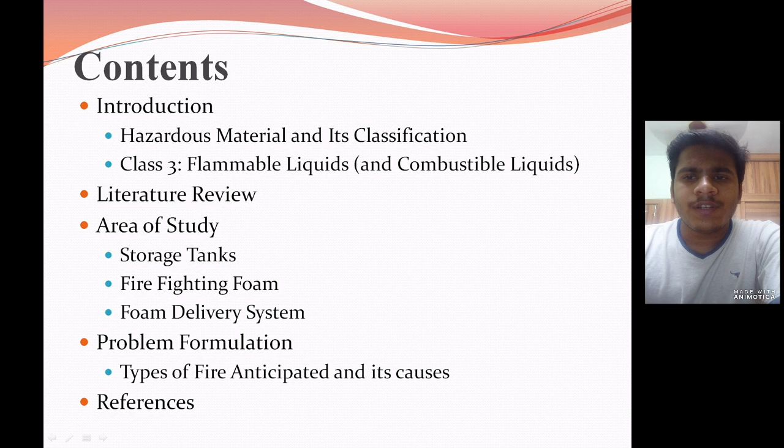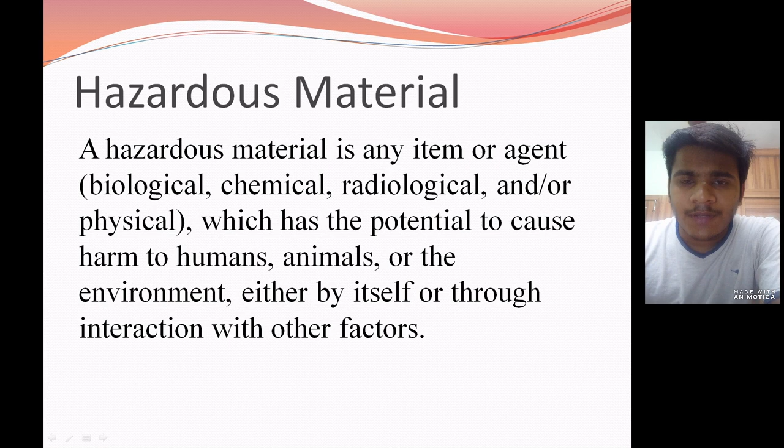Now let's start with introduction. Hazardous material are the objects which pose any potential to harm the environment, humans, animals around it, either directly or indirectly. Classification of hazardous material.

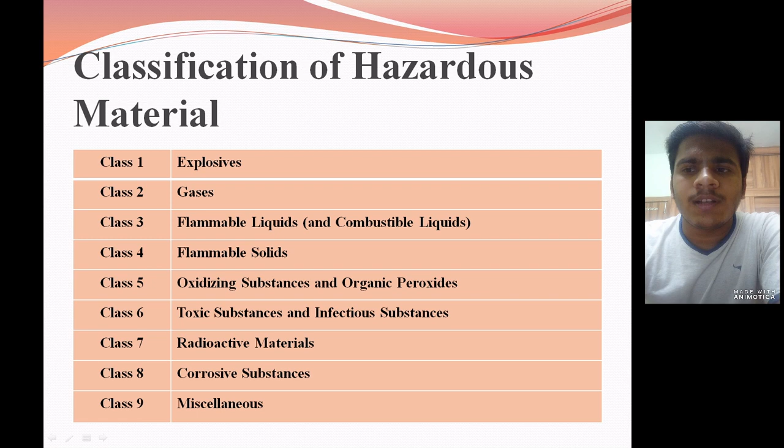The most worldwide accepted classification of hazardous material includes 9 classes: class 1 explosive, class 2 gases, class 3 flammable liquids and combustible liquids, class 4 flammable solids, class 5 oxidizing substances and organic peroxides, class 6 toxic substances and infectious substances, class 7 includes radioactive materials, class 8 includes corrosive substances, and class 9 includes miscellaneous substances.

This project is mainly focused on the storage of class 3 substances, that is flammable liquids and combustible liquids. This category is divided into two divisions: class 3.1, flammable liquids, which are liquids with flash point below 60 degrees Celsius, and class 3.2, combustible liquids, which have flash point above 60 degrees Celsius.

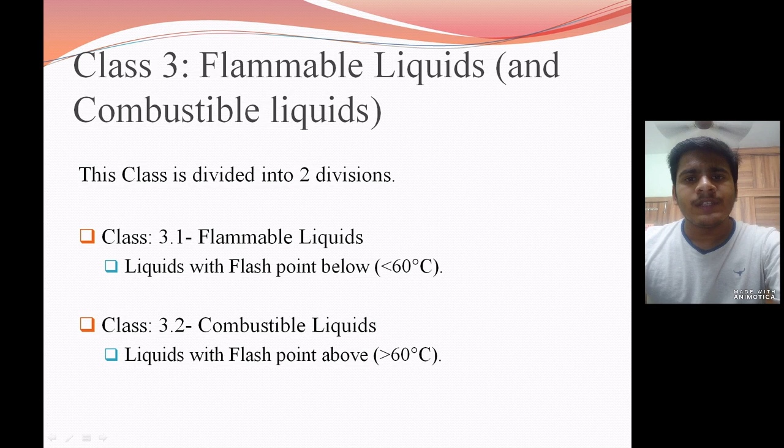Hello everyone, my name is Anurag Verma and I am going to talk about the literature review of our project. The first literature review was given by H. Pretrel, W. Le Saux and L. Audouin in 2013. They contributed the experimental determination of the heat release rate of hydrocarbon pool fire based on oxygen consumption and carbon dioxide generation. They presented the chemical methods for the experimental determination of heat.

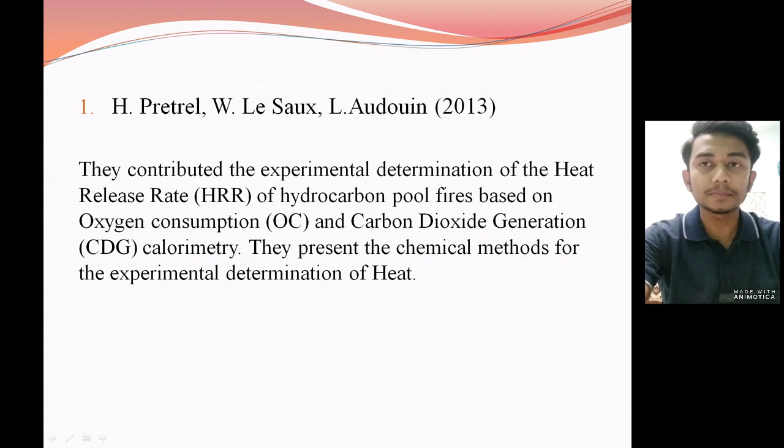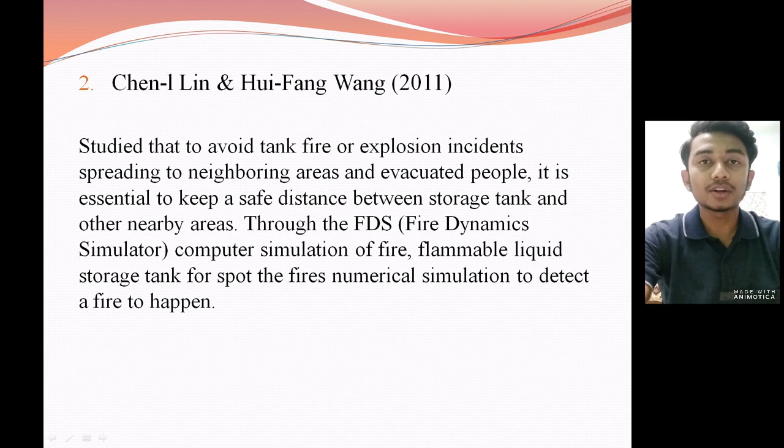The second was given by Chen Lin and Hui Fang Wang in 2011. They studied that to avoid tank fire or explosion incidents spreading to the neighborhood areas and evacuated people, it is essential to keep safe distance between storage tank and nearby areas. They did it by a fire dynamic simulator. It is computer simulated, which simulates flammable liquids storage tank for spot fire numerical simulation, to detect a fire to happen.

The next review was given by Ibrahim M. Shaluf and Salim A. Abdullah in 2010. They did research on boilover, which is considered one of the most dangerous fires in large scale fire. Boilover is basically when water, having higher density than most flammable liquids, settles down in tanks, and after a certain temperature it boils and creates huge explosion, because the water molecule expands to 1700 times its volume.

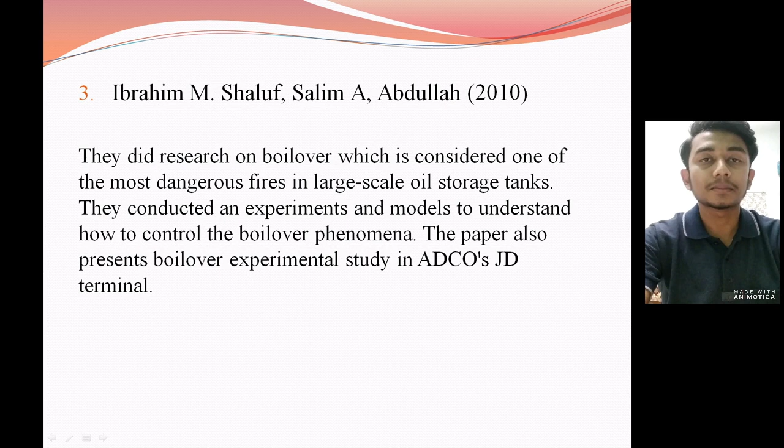So they conducted an experiment and models to understand how to control the boilover phenomenon. The paper also presented a boilover experiment study at ADCO's JD's terminal. Here ADCO is Abu Dhabi Company for Onshore Oil Operation.

The fourth review was given by Sir Thomas Steinhaus and Richard Carvel in 2007. They focused on burning behavior of large pool fires and fuel spill fire, and gave details of pool fire dynamics and considered factors which affect the pool fire. A series of well-defined parameters have been established to classify pool fire in a quantitative manner. The research clearly shows that despite the enormous body of work on large-scale pool fire, there are still significant uncertainties in our capability to predict the behavior of such fire.

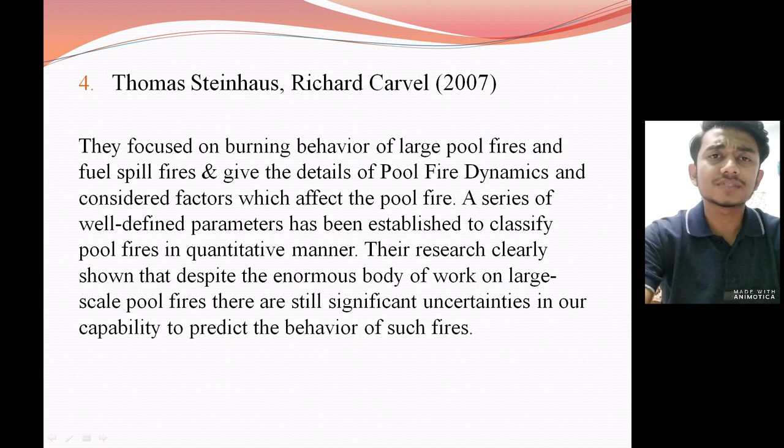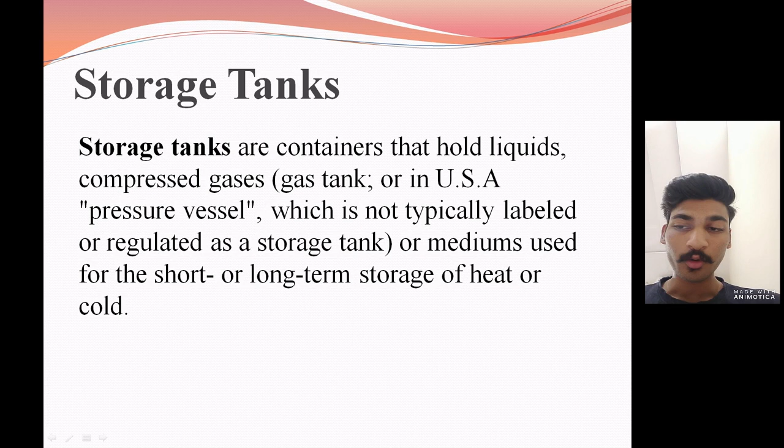My name is Abhinandan Chauhan, and now comes the area of study, in which our first part is storage tank. Storage tanks are the containers that hold organic liquid, non-organic liquid, compressed gases, and petroleum products. Storage tanks can be widely seen in petrochemical industries, oil refineries, etc. Storage tanks have different sizes ranging from 8-meter diameter to 90-meter diameter. Storage tanks are often cylindrical in shape, perpendicular to the ground, with flat bottom and a fixed or floating roof. Now let's come to the types of storage tank. As we know, there are 4 types of storage tank, which can be clearly seen on the screen.

They are: first, open top tank; second, floating roof tank, which are subdivided as external floating and internal floating roof tank. Third is fixed roof tank, which is subdivided as cone roof, dome roof and internal floating roof tank. The fourth type of tank is other tanks, which include bullet tank, bolted tank and sphere tank.

Now let's talk about the fixed cum floating roof tank. It is the safest storage tank, used for the storage of petroleum products of class A and class B. These tanks have a fixed roof over a floating roof. They are used for products having very stringent water content specifications like aviation turbine fuel, and products sensitive to oxygen like light intermediate feed tanks.

Another type of storage tank used for the storage of petroleum products is the floating roof tank. It is the most widely used storage method to safely control product evaporative emissions from volatile petroleum products. They are subdivided into two categories: external floating and internal floating roof tank. Both types are used for the storage of highly volatile substances like naphtha, xylene, toluene, etc.

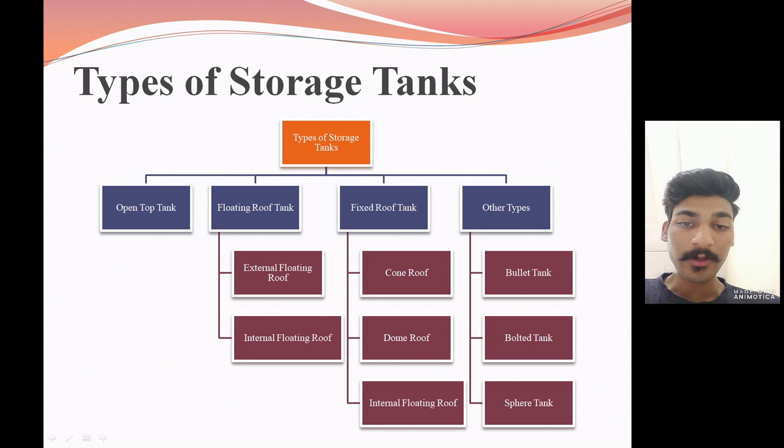Horton sphere is another type of storage tank used for the storage of liquefied gases, and the dome roof, which is a type of fixed roof system, is used for lighter material whose vapor pressure lies between 0.85 to 1.06 kg per centimeter square.

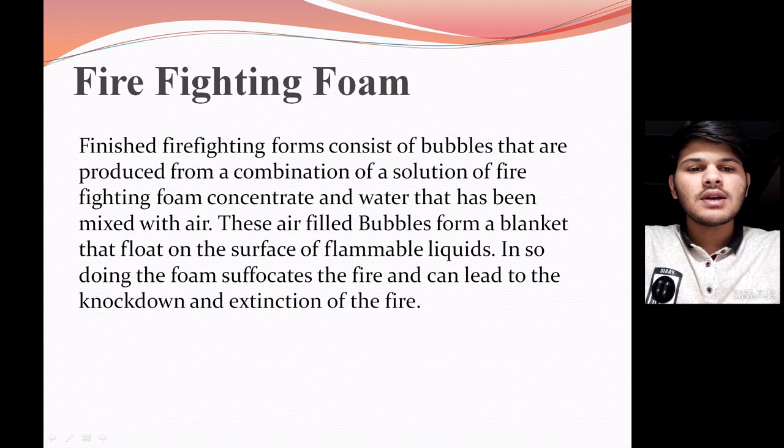These foams are provided first by mechanical foam compound. These foams are produced by air entrainment through mechanical means such as aspiration or air blowing. Mechanical foam compound is again classified into three types depending on the expansion ratio of the compound: low expansion ratio, medium expansion ratio, and high expansion ratio.

Low expansion of these foam compounds is up to 20 times. Medium expansion foam compounds can expand up to 200 times their volume and are generally produced by self-aspirating foam branch pipe with net. High expansion foam compounds have an expansion of up to 1000 times their volume and are generally produced by foam generator

using air fans. Second, chemical foam. Chemical foam is generated by chemical reaction. The most common ingredients used for chemical foam are sodium bicarbonate and aluminum sulfate with added stabilizer.

Classification of foam by composition. First, protein based foam. These are made from hydrolyzed protein with added stabilizer and preservatives. They form a thick foam blanket and are suitable for hydrocarbon liquid fires but cannot be used on water miscible liquid. Their effectiveness is limited on low flash point fuel which have lengthy pre-burn time.

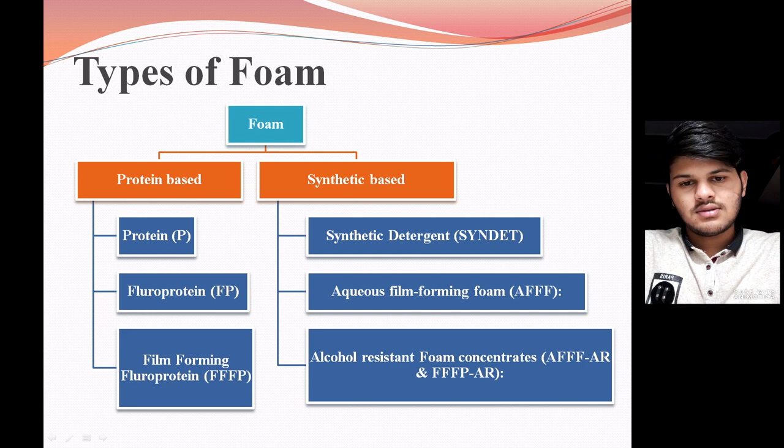Conveying systems are of all-outlet type in which foam discharges from all outlets at the same time, covering all the hazards. The conveying system consists of water supply and foam concentrate, proportionator, piping system, etc.

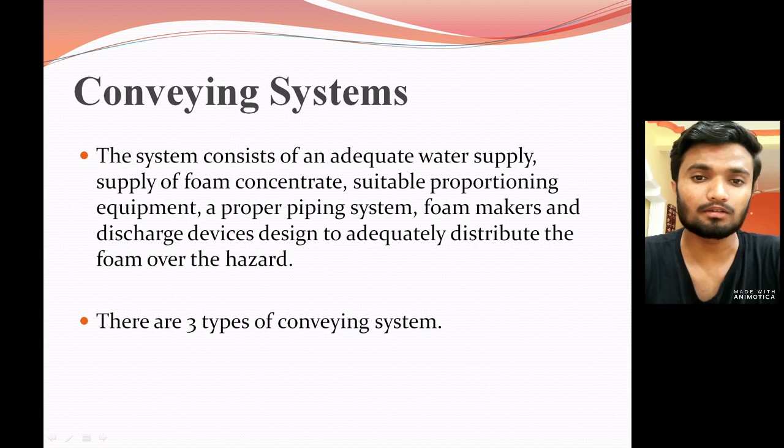Conveying systems are of three types, which are as follows: first is fixed foam conveying system, second is semi-fixed foam conveying system, and the last is mobile conveying system.

Now coming to the first type, which is fixed foam conveying system, in which fixed piping is used to supply water at adequate pressure, and foam concentrate tank, eductor and proportionator are used to discharge and make a foam solution.

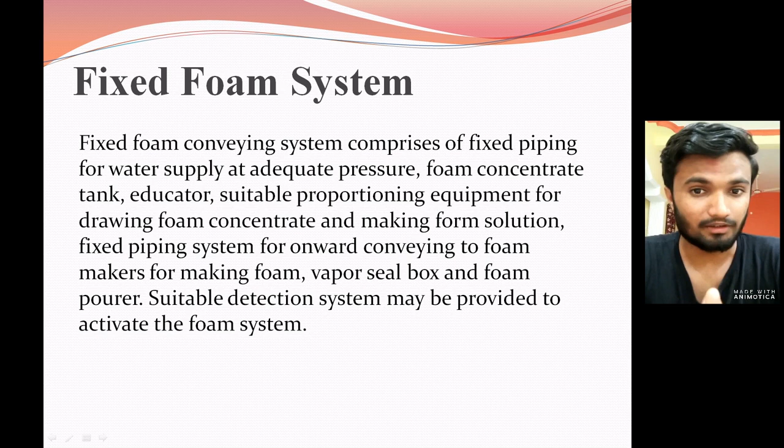And this system also may use a detection system to activate the system. Now I come to the second type, which is the semi-fixed foam conveying system, which is used to supply foam concentrate through a mobile foam tender, and fixed piping connected to the foam makers, vapor seal box in case of cone roof tanks, and foam pourer in case of floating roof tanks, to convey foam to the surface of the tank.

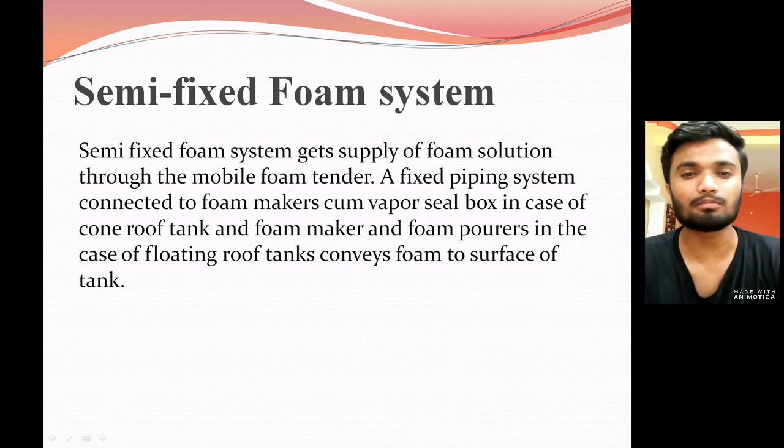Now I am coming to the third type, which is the mobile system. It includes a foam producing unit mounted on wheels, which may be self-propelled or towable by a vehicle. These units supply foam through monitors and foam towers to the burning surface.

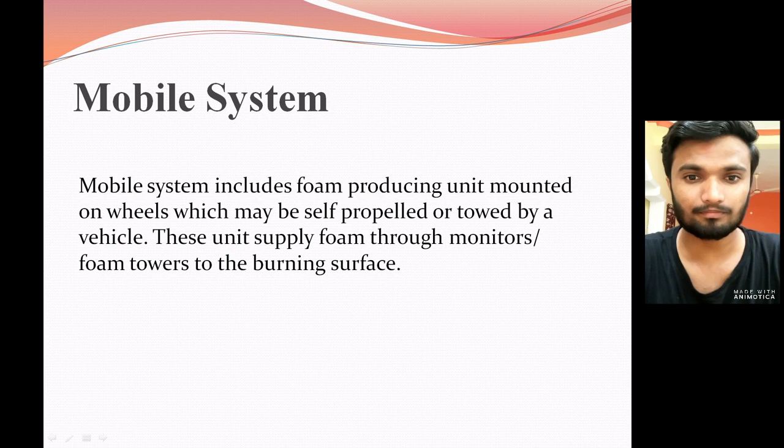Hello everyone, I am Abhishek Portfole and I am going to talk about the types of fire anticipated in storage tanks. Number one is overfill ground fires. Overfill ground fires result from piping or tank leakage. Many times, they are the result of another cause, such as operator error or equipment malfunction, and are considered the least severe type of incident. If a leak occurs without ignition, exercise caution and isolate all ignition sources. If ignition does occur, then simply treat such a fire as a large pool fire.

Now, we have vent fires. Vent fires are typically associated with fixed roof tanks such as cone or internal floating roof tanks. The main cause is a lightning strike that ignites vapors which may be present in the vent. This is a less severe type of fire and can usually be extinguished with a dry chemical powder.

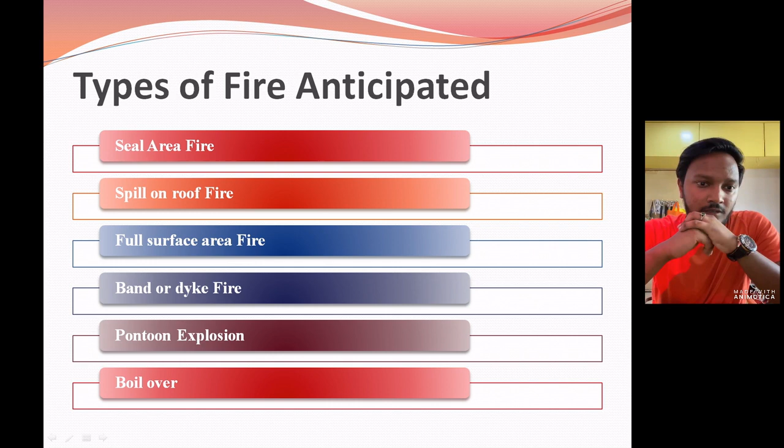Then we have rim seal fires. Rim seal fires comprise a large majority of fires in external floating roof tanks, but can occur in internal floating roof tanks as well. As with many tank fires, lightning is the primary cause of ignition, although with floating roof tanks, an induced electrical charge without a direct lightning hit may occur. Because these fires are the most common, there is usually a high rate of successful extinguishment, assuming that there is no collateral damage, such as pontoon explosion failure.

Now we have obstructed full liquid surface fires. Obstructed full liquid surface fires can occur in fixed cone roof tanks. They tend to be challenging because the roof or pan blocks access to the burning surface. The roof or pan can sink for various reasons, such as an increase in vapor pressure under an internal floating roof, which can cause the pan to tilt. The pontoon failure of external floating roofs is commonly caused by closed drain valves during rains or mechanical seal failure, causing the pan to sink.

Then we have unobstructed full liquid surface fires. Unobstructed full liquid surface fires are relatively easy to extinguish when the tank diameter is relatively small, that is less than 150 feet, and sufficient resources and trained personnel are available. The most challenging fires will involve larger tanks, that is greater than 150 feet in diameter, because of the surface area of the fire and the amount of resources needed to control and extinguish the fire. Unobstructed full surface fires can occur in fixed roof tanks without internal roofs, where the weak seam of the roof-shell joint separates as a result of an explosion or an overpressure event, leaving a full surface tank.

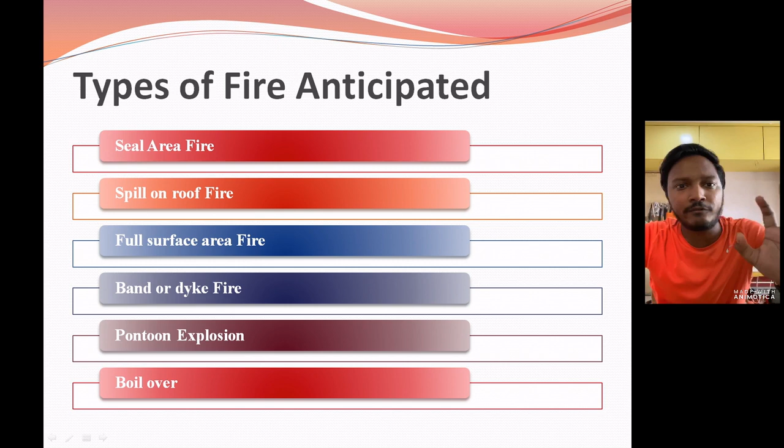Now, let us talk about some causes. It can be caused due to operational errors, that is, if an error occurs during operation, it can lead to a fire. Also, a fire hazard can occur if the equipment or instrument undergoes a failure. One of the most important causes that is often overlooked is static electricity, which can also lead to a fire hazard. We also have maintenance errors.

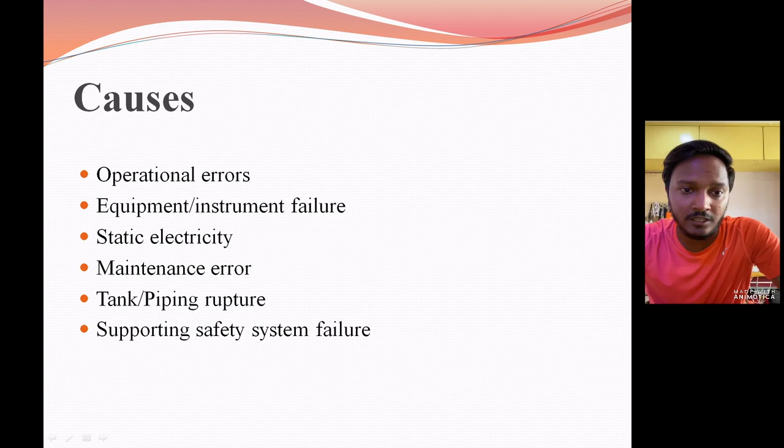Then we have tank and piping rupture. Due to increased pressure, the tank and pipe undergo a rupture, which may also lead to a fire hazard. Then we have supporting system failures, that is, the safety systems that are used to tackle the fire hazard. If they undergo failure, it may also cause a fire hazard.

Now, let us talk about some references. We have the US Department of Transport, the Emergency Response Guidebook 2012, GSDMA, that is the Gujarat State Disaster Management Authority, IS 10987:1992, reaffirmed 2003, IS 803:1976, and NFPA 400.